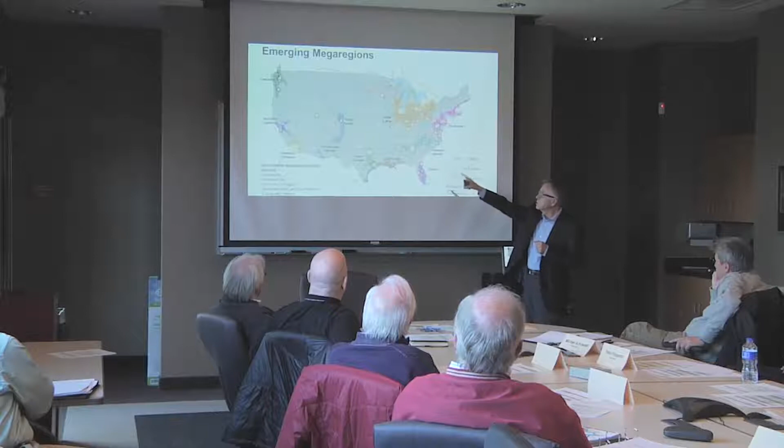You'd notice on these that the 6 million figure is the big circle. That's important for understanding where population is, where it's going, and where we sit in the upper Midwest—we're a small circle, about 1 to 3 million. But the influences of these mega regions are going to have an impact on us, especially if we start thinking about future climate impacts.

So you hear about California all the time right now about lack of water. It's also in the southwest and the deserts of Arizona. It's also happening in Texas. It's happening across the whole southern part of the United States.

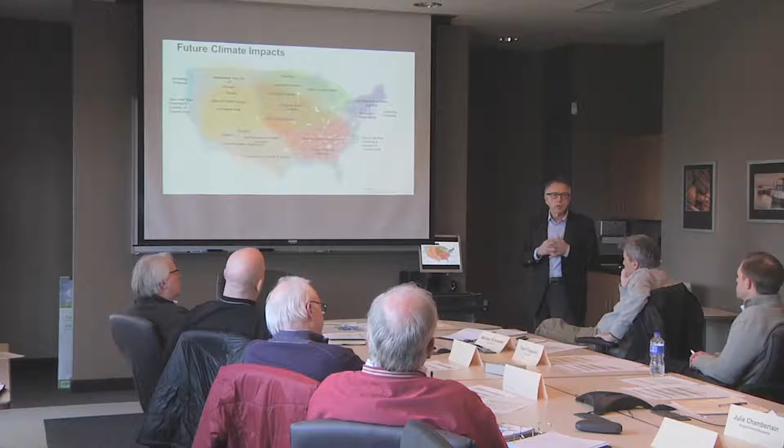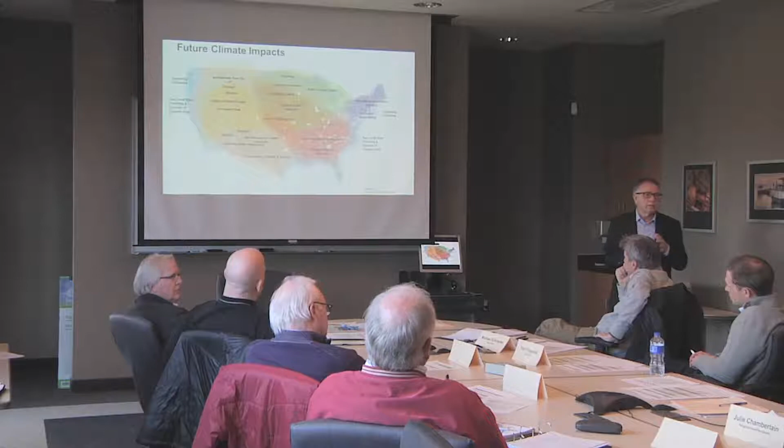What does that mean to us up here in the north, where we have an abundance of fresh water? Abundance now, and if we don't take care of it, we'll lose it. That means that our ideas about population could very well change. If we project over the next 15 years, we might have 600,000 to 800,000 more people, but if the current trends in the south keep going the way they're going, we could have 5 million more, and we're not ready. We're not even close to being ready for that kind of magnitude of change.

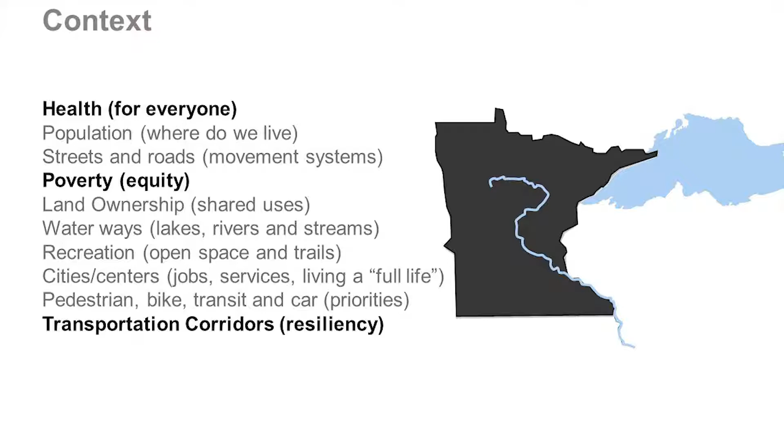So our context really has all of these issues, but focusing on the ones that have the most impact, we think, is important for how that will change the way we think about our cities. Health, again, for everyone. We know about population, streets and roads and movement systems. We've got to figure out the poverty and equity issue, land ownership, waterways, recreation, city centers, pedestrian, bike, transit, car, in that order, and then transportation corridors in terms of resiliency. So those three, health, poverty, and transportation, we think are important.

The way these things work is that there's a series of overlays. We've looked a lot at underutilized land and regional systems. You look outside anywhere in our region, and you'll find land that's not being cared for, land that's thrown away, land that's being used for things that shouldn't be used for. And so we've looked at a lot of those kinds of systems, and we want to use them to reconnect and re-aggregate some of the loose ends that we see.

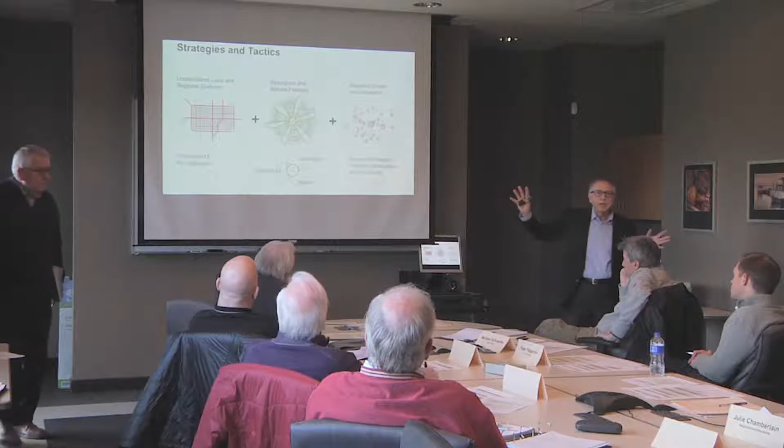We have to overlay that with the natural resources and natural patterns. Simple thing, but if you look out the window, there's a lot of green out there, and the way that's working is quite beautiful. That's just one small part, and that's the part that's being taken care of. There are many other areas that are not being taken care of. They relate to community, agriculture, and nature. We want to understand those relationships.

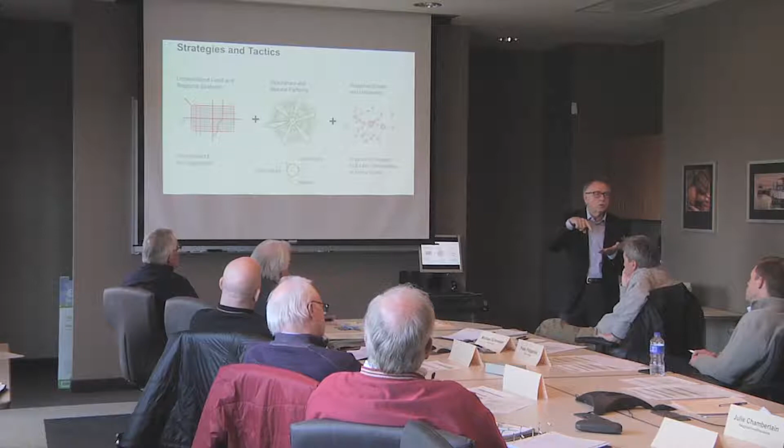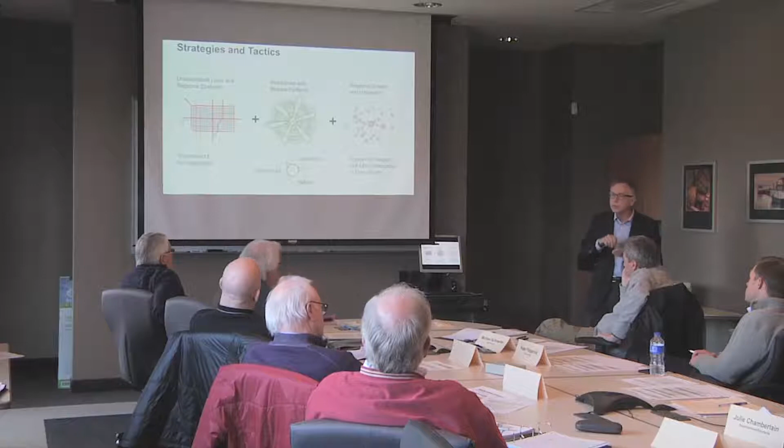And then when it comes to regional growth and habitation, we don't see Minneapolis-St. Paul as a center. We see this region as a number of centers. We all have to stand on our own, and we have to relate to one another. So Edina is the center here. It's not Minneapolis as your center. So that polycentric region, full life communities at every scale, is really critical for sustainable culture going forward.

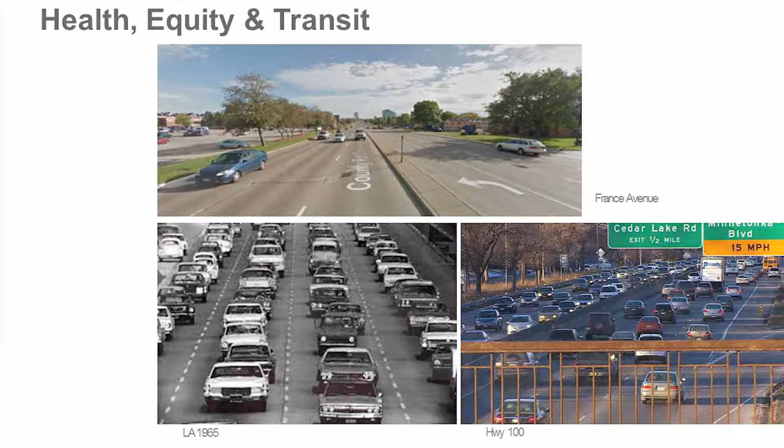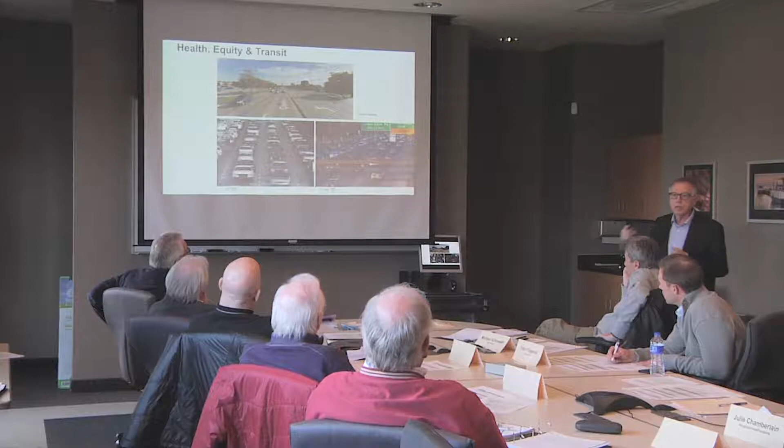And then you look to the right, and it hasn't changed. It's gotten worse. The land on either side has gotten worse. It is less taken care of. That's France up there. France is the same size as an LA freeway. We need to talk more about how that really impacts your lives and what that traffic is like.

So if you come back to those kind of traffic patterns, we want to look at the density of the region. The lighter colors, the sort of purple color, represent areas of poverty. That's where we drove our freeways through initially in the 50s and 60s. We wiped out neighborhoods, we cut them apart. But that freeway system is also something that connects us and can be a valuable resource if we start to use it as a resource and start to pay for it in the ways in which we should.

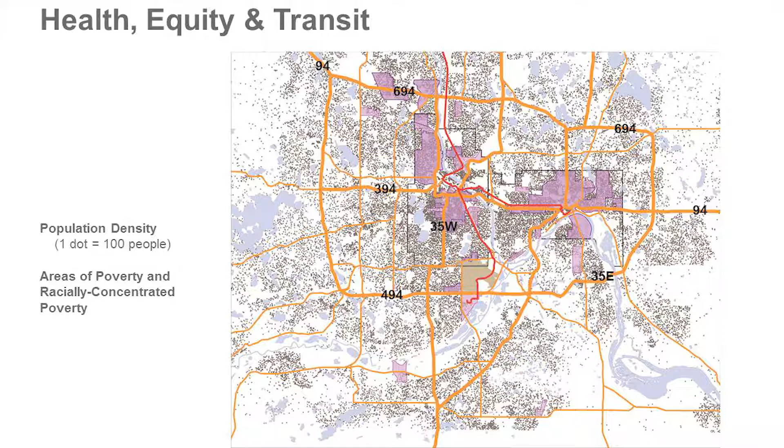It connects jobs. Now, we expect jobs to be easily accessed. They're not if you're spending an hour and a half in a car to get to your job. So we have to change the way we think about how jobs are organized.

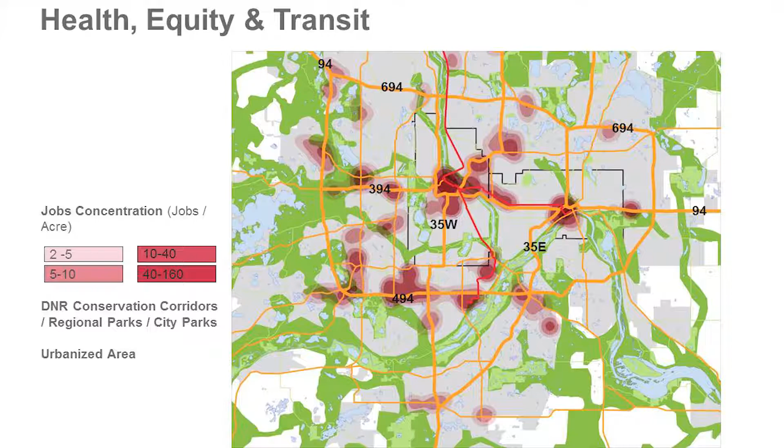If you look right down here, this is pretty important. That's where you guys are. You have almost as many jobs, if not as many jobs, as Minneapolis. You have half, a quarter, a third of the population. You have more jobs here in Edina than in Minneapolis. That's an important thing when you start looking at the connections that you need to make, the freeways and how they're used.

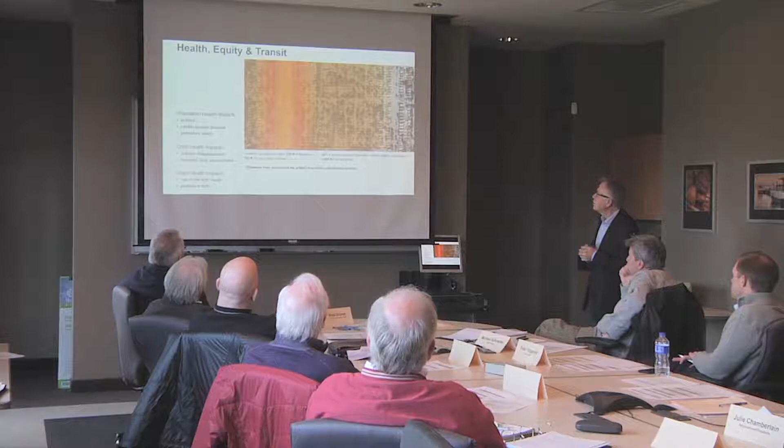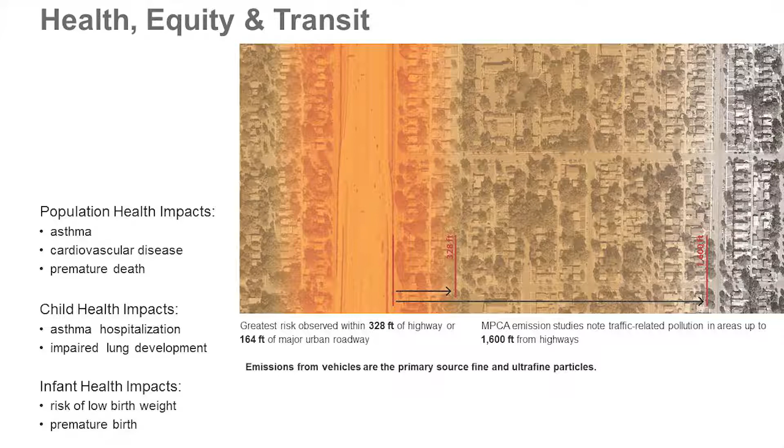The negative part of the freeway is it has a health issue related to it. Think about the freeway, and it's really dangerous in the amount of particulate within 300 feet. You have population impacts related to asthma, cardiovascular disease, premature death. For children, unbelievable—asthma is up. Impaired lung development is not good. Infant health risk, low birth weight, premature birth.

This happens to be where we put all the housing that relates to where the poor go or the disadvantaged. We put elderly in that same location because the land is cheap. But if you look at that risk, it goes for another 1,600 feet.

Just think about your street in France, and the amount of traffic on that, or Washington Avenue in downtown Minneapolis. It's as polluted as a freeway, and yet we allow that to happen every day and don't really take care of it.

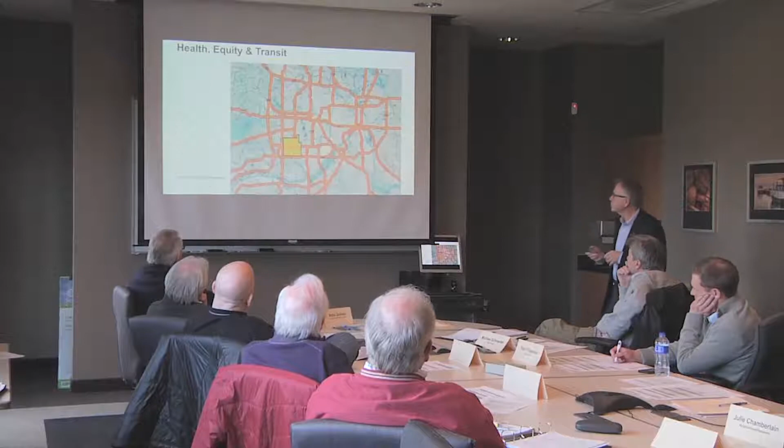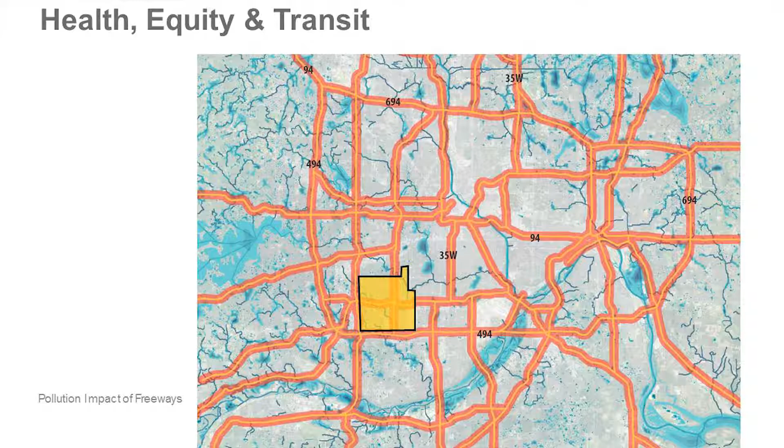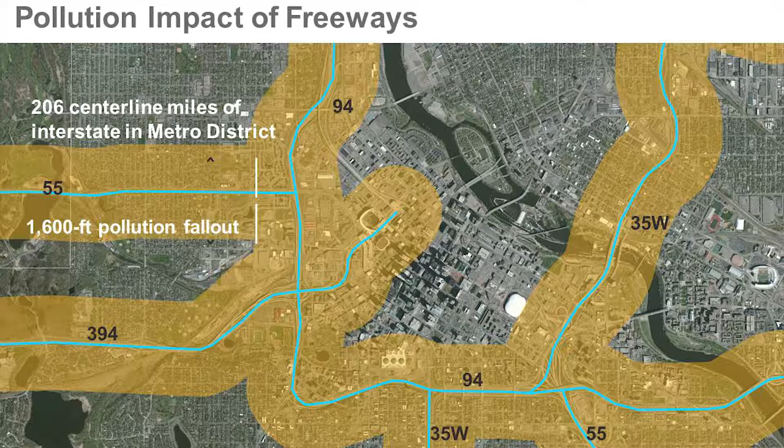So here we are. Here's your part of the world. This yellow line is the roadbed, the orange is the pollution. And when you look at that in greater detail, like in Minneapolis, there's not much left that isn't polluted. And that doesn't include the major roads like Franklin, like Washington Avenue, major roads that cut through our cities. So the impact on our health is being challenged every day.

But it also has created this kind of idea that the freeway is a place that is not valuable—it's only about a roadbed. So if you go out to 494, you go to Highway 100, just think about how those edges have been treated and what that experience is like.

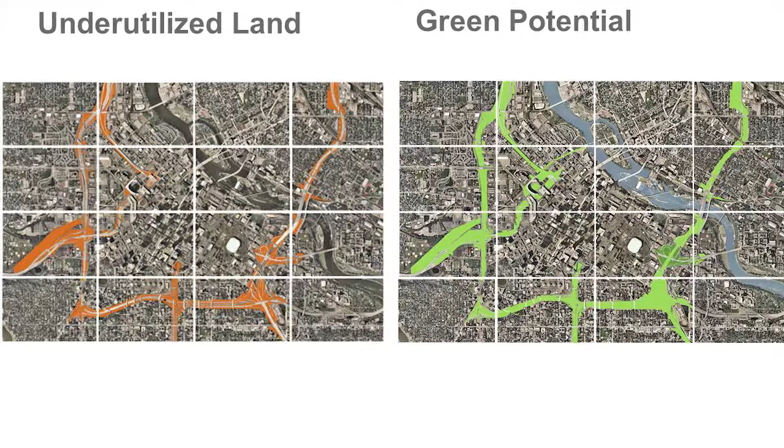So we think that underutilized land that sits around the roadbed on freeways is valuable. We think it has potential to become green. And what we mean by that is that green, that road system, that underutilized land can have a lot of other purposes. The green, by the way, if we made that a park in Minneapolis, that would be the same size as Central Park in New York, and yet we don't use it for anything at all.

So the green potential might be to provide energy. If we go clockwise, provide energy. We could use the red roadbed that's left, the underutilized land, for commuter high-speed rail. We could bridge it, we could knit it, we could reconnect our communities and create amenities. We could restore neighborhoods. We could build on it.

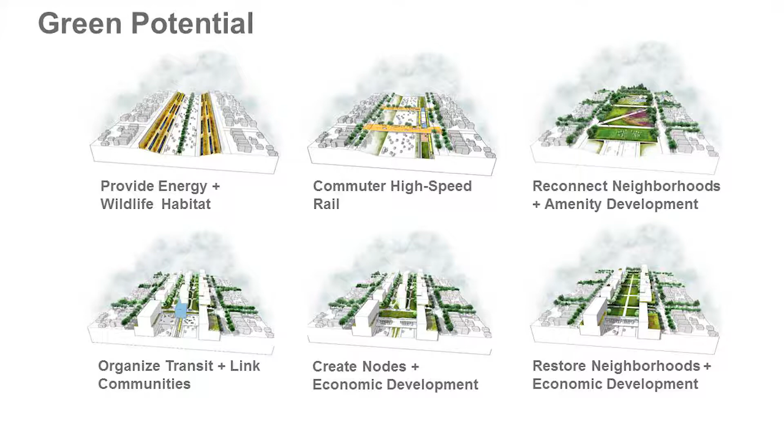We could build around its edges. We could create green. We could create district parking. We could use it for economic development. We could be an engine for change. It could organize transit and link communities.

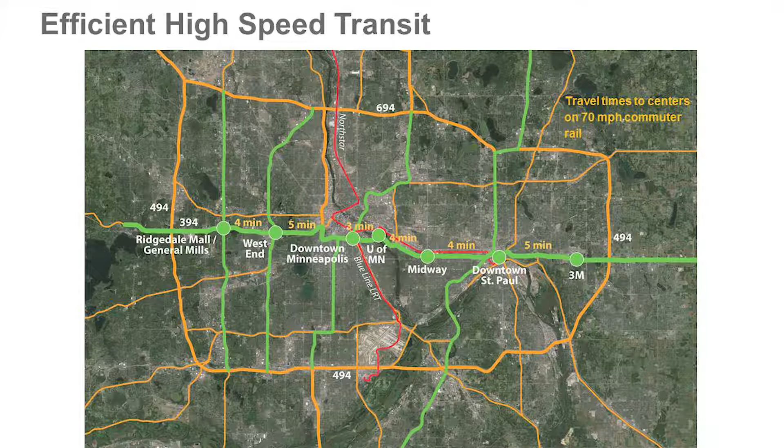In fact, we could have this kind of scenario if we used it for transit, high-speed rail, where you could go from 3M to Ridgedale in less than 35 minutes. What would that do to connect people up to jobs? If you're a single mom and you've got a kid and you're trying to get to a good job and it takes you a couple hours, that's not going to have a great impact on your social life, your cultural life, or your children's life.

So we've looked at that in a couple ways. We'll get to development in a second that relates to community, but freeway development—there's the roadbed on the left. The existing tax value is zero. It's negative, we pay for it. We don't get anything from it except the use of the road.

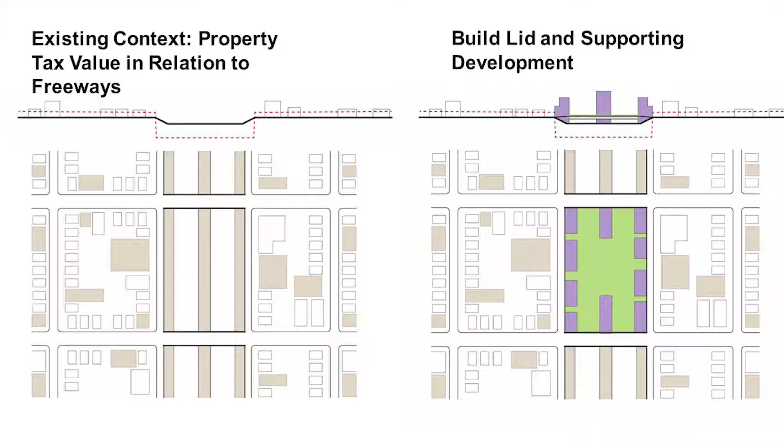But if we start thinking about using the underutilized land and started to build on that, then we start getting something that looks like this. So now that value of where that freeway was—we've got district parking in there, we've got increased value, increased taxes, we've got a localized boost in value, property value spreads.

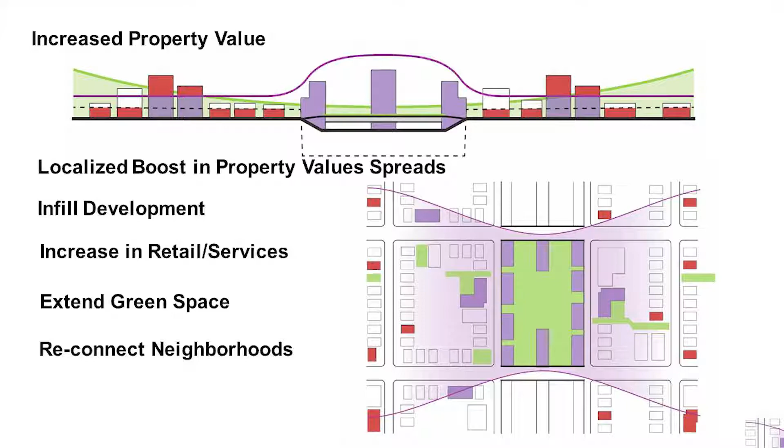We think that can be used to repair infrastructure. So you build and develop, and when that spreads, you get opportunities to start rebuilding what isn't working today. Infill development occurs, you get increase in retail services. That means that adjacent neighborhoods along the freeway that didn't have access to those services now have them. And that's an important change in the way the community edge works.

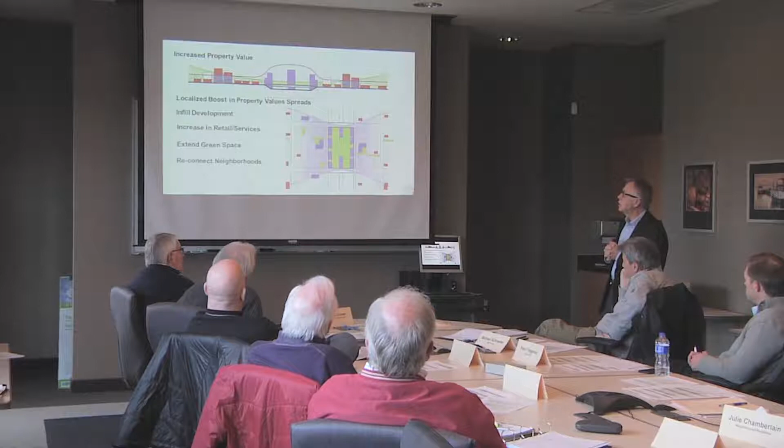We can extend green space and we can reconnect neighborhoods. This also happens in the middle of your city. It could happen in between France and York and 494 and 62, and it looks like this. There's lots of open land.

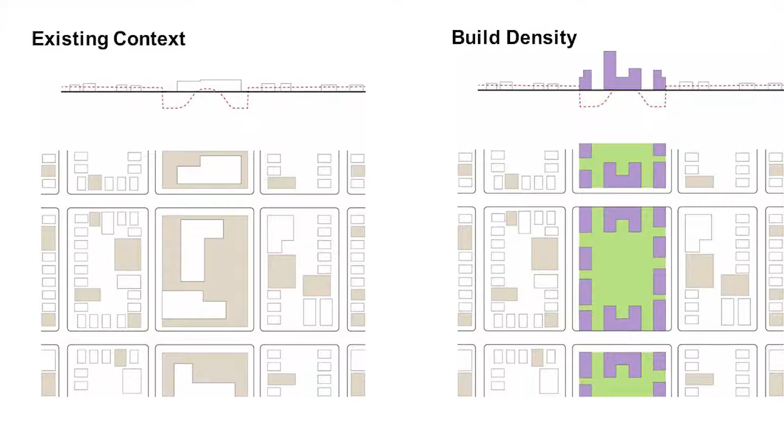If there's not the right sort of ratio of density in that area, then you're going to get lower taxes. If you begin to build density—and density can be a lot of different things, it doesn't mean tall buildings—then you start to get, again, that increased value. That's an important part of being able to use that in other ways. That's a way to develop your infrastructure, create more infill, increase retail services or services for the community, extend green space so you're starting to connect it out into the community.

So the best part of this, though, is when you think about it this way, you don't touch the existing context.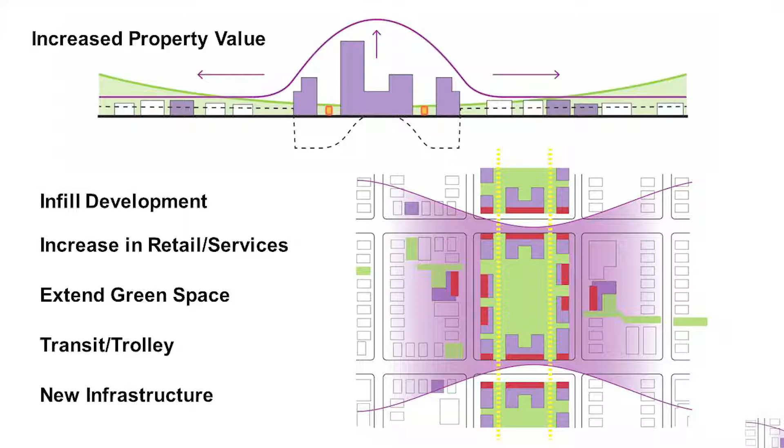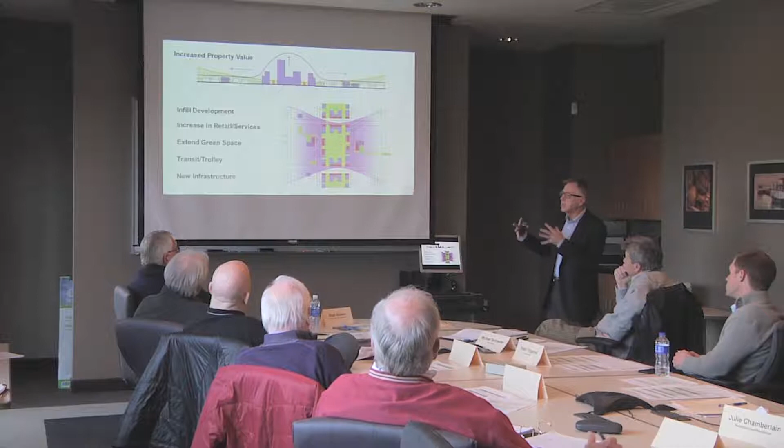You help it, you support it, but this is about not changing our neighborhoods. It's trying to build additional support for our neighborhoods. This is the most important part of this. When you look across your city and you see these neighborhoods you all live in, they're beautiful, they have history, they're part of the cultural and social life that makes this place unique. You don't want something to come along and change it and change it. What we want to do is make it better by adding things to its edges and making good transitions so that existing neighborhood gets to stay exactly the same way.

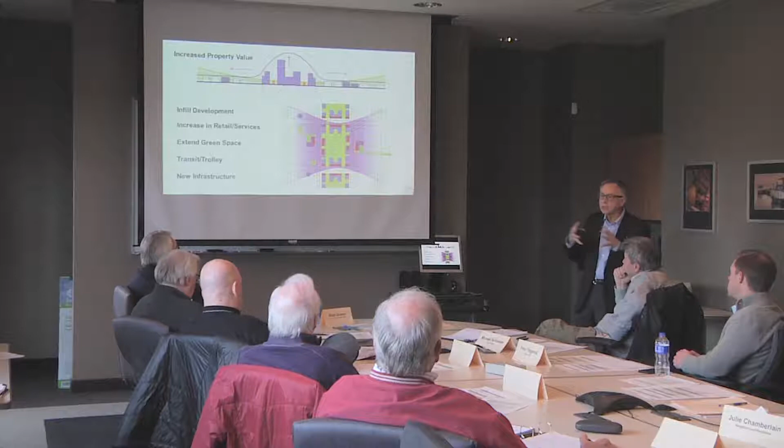So let's look at the underutilized land that you have and begin to understand how that can become part of what we want this to be holistically, in terms of a better, denser community.

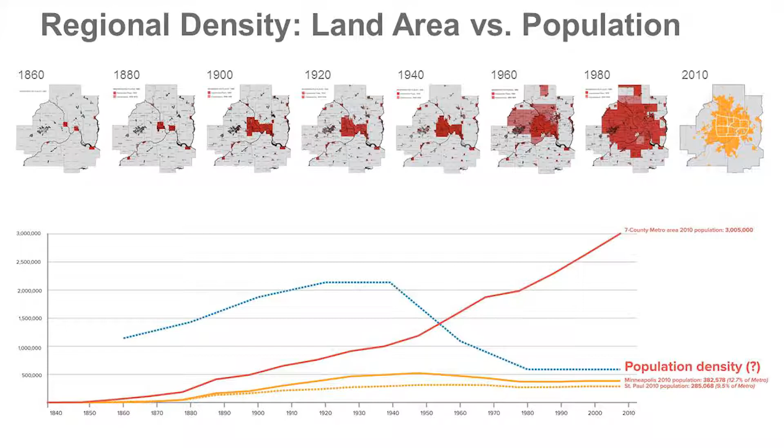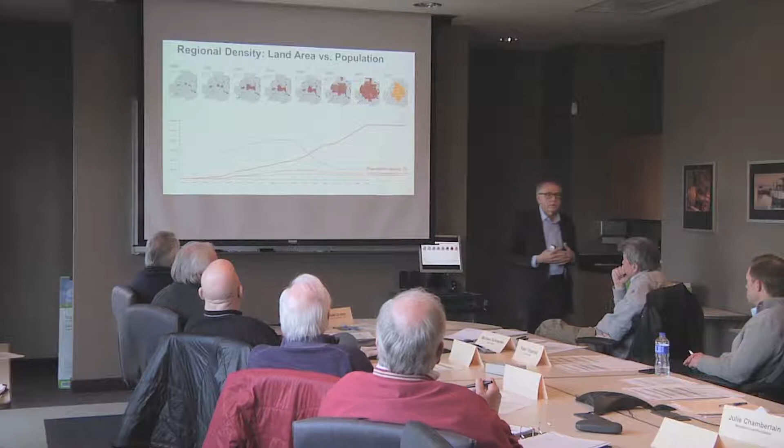So, regional density by land area: look at 1860. About 1940, we were doing okay. We had great cities, before the car and the freeway took over. They were more compact, population and growth were at a measure, you could get everywhere you needed to go. But then our density decreases as we get towards 2010, and we get all this land in between our cities. So we've gone the opposite direction.

The really scary part is that if you look at the combined area in our region, population of 3 million, we've got 426 inhabitants per square mile. That's our metropolitan area, a staggering number. When you get down to Minneapolis and St. Paul, we're at 6,000 inhabitants per square mile. So there's a big change there.

So you start thinking about how we live in between all these spaces. You get to Edina, we've got 16 square miles, and we're at 3,000 per square mile. So there's some capacity there that we're not recognizing, in the way we could begin to think about the spaces we have and change those.

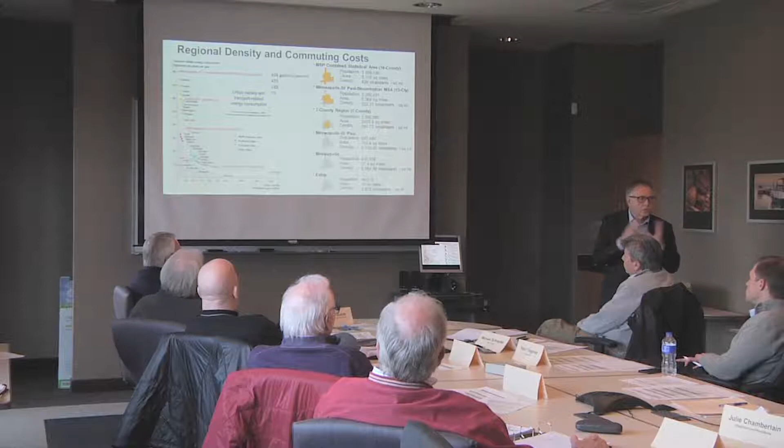The other thing: if you look at Minneapolis, in terms of the overall region, we use 608 gallons of gas per person. That means every person in the region, all 3 million people, could be in their car every day, every week — fathers, daughters, brothers, sisters, babies, all of us, all week long, driving our cars. And if you multiply that by 7, that's the number of parking spots we have on the national average for every car. So you can see we're being consumed by this transportation nexus of the automobile and energy.

So Edina is at 455 gallons per person. Minneapolis-St. Paul, just the cities themselves, are at 288. Copenhagen is at 75 gallons per person. That's a city with a different way of moving people, thinking about the way they live each day. The energy costs really drop in those cities as you get to the more European model of density. So how do you measure that?

Bruce, you want to talk about, we have a...

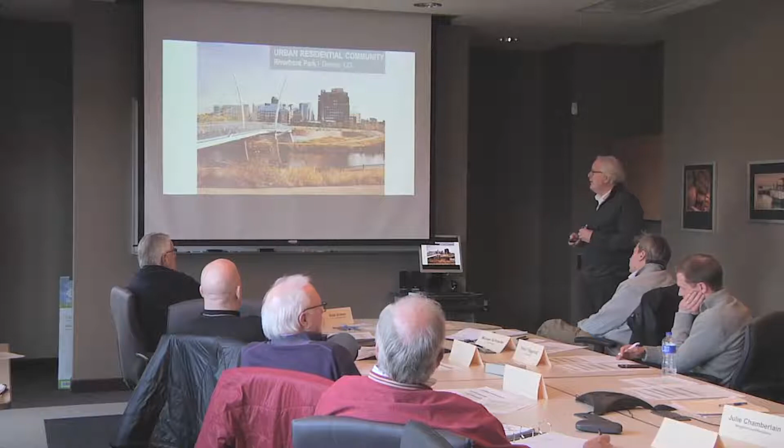So Denver, related to what Mick was setting the stage for, a lot of what Denver did in the last couple decades was really based on an enhanced public realm. When you talk about underutilized properties and taking advantage of sites that were laying forgotten, at the same time they had very powerful leadership.

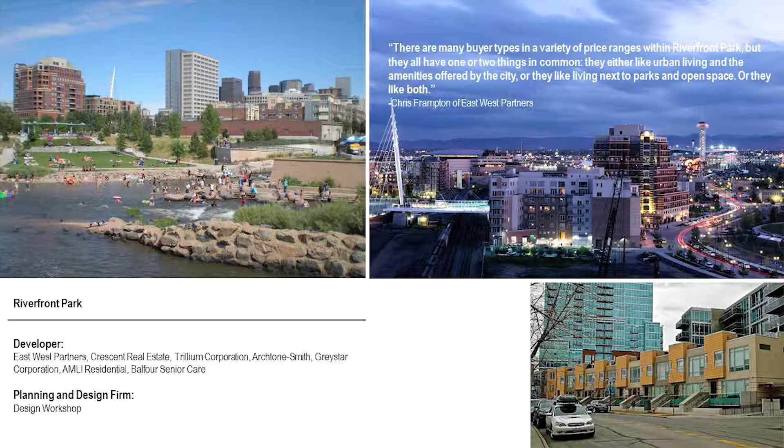Federico Pena at the time came forward and said, imagine a great city. He talked about building a transportation system that supported it. They talked about the Platte River Valley, a professional baseball team, a world-class conference center. All of those things came together at the same time, but it highlights that as they were examining all of this and paving the way for world-class development, it was this framework of public space, movement systems, and infrastructure that really made it possible for all these other parts and pieces to come in and populate these areas.

So what you're looking at here is the Cherry Creek Greenway on the left, and the Platte River coming through, and where the two join is called Confluence Park, a whole area of redevelopment. I'm sure you've at least heard of or seen articles about Lodo and the rebirth of much of downtown Denver around their ballpark and so forth.

And it wasn't urban renewal, it wasn't tear-down. A lot of it was adaptive reuse, really based on working with the strengths of what their downtown had to offer, capitalizing on natural resources and public realm.

So phased large-scale projects, knowledgeable landowner, enlightened leadership, but what came out of that was a better than expected level of investment from the private sector, and it intensified—but not all tall buildings, rather a mix of different housing types and height and density models within this whole corridor.

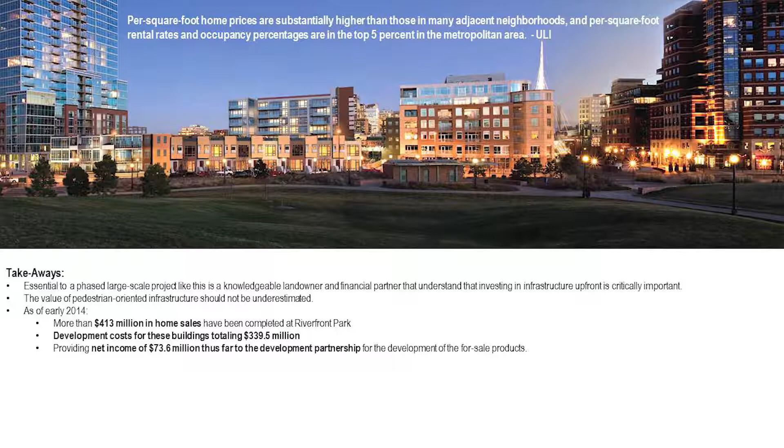Net income of $73.6 million thus far for the redevelopment that's gone on in that part of the city. It's been a positive win-win for everyone.

Downtown Austin. Two things about Austin: one of the things about downtown Austin that really came about was a partnership with the university, and so the rebirth of parts of that downtown was really predicated on the university coming forward and making its own investment.

But there are other parts and pieces similar to Denver, where they're looking at underutilized land, the amenity value of riverfront, and all these underutilized parcels, and how you convert that integrated with a great public realm framework, infrastructure, and movement systems to do these kinds of projects.

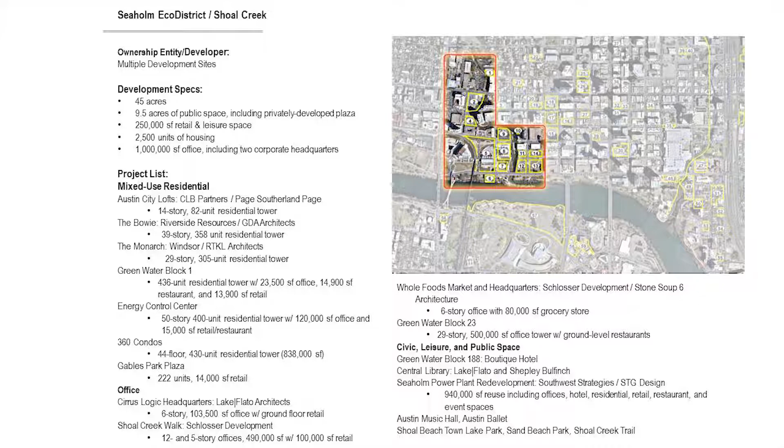So the development specs there: we're talking about 45 acres, trying to relate these things to the Southdale corridor in France and York and so forth. 9.5 acres of public space really was the framework for development, but what it led to was mixed-use residential, office users, civic, leisure, and public space. It was really about jobs creation, public space, housing, and this fabulous mix related to amenity and infrastructure.

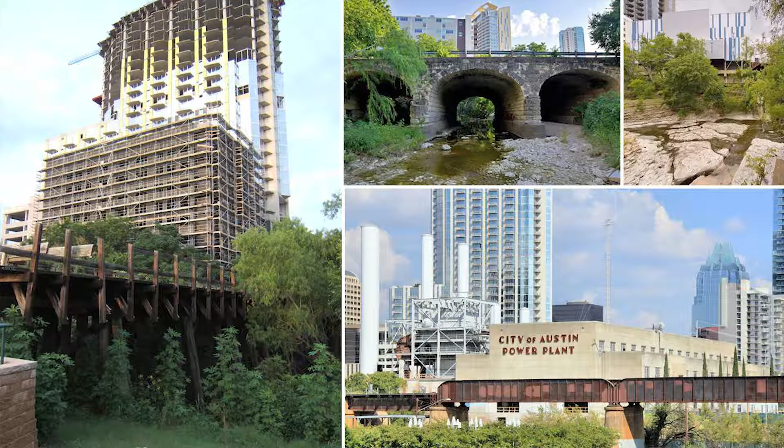Also talks about the events—there's a programming component to this. We've talked about this at scale: where is the center of urban life? Where are people, where are you trying to attract people? Where are they inclined to come and gather at various scales, whether large events or small events, and how the street functions as part of the public realm.

Attracting jobs is a big part of what we're talking about here. Mick touched on the fact that with France Avenue and York and so forth, those corridors - 76th, 78th, whatever - are really primed to bring in additional employers.

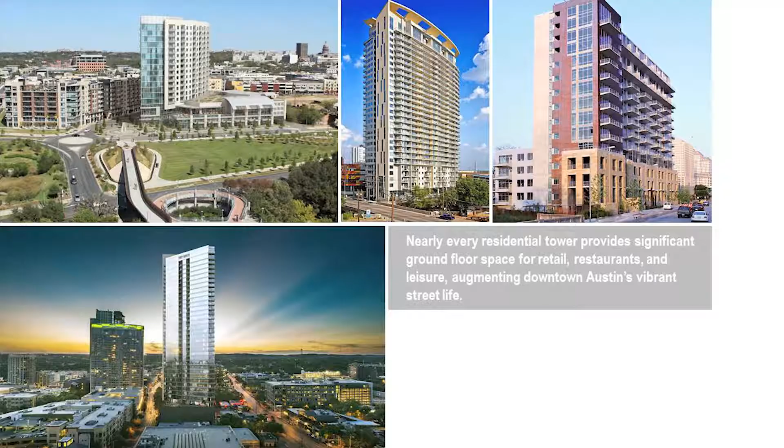Nearly every residential tower provides significant ground floor space for retail, restaurants, and leisure, augmenting downtown Austin's vibrant street life. Different models, like Mick was talking about in the diagrams - whether you're holding on to more open space and doing more of a tower, or you're spreading it out with lower building heights and so forth.

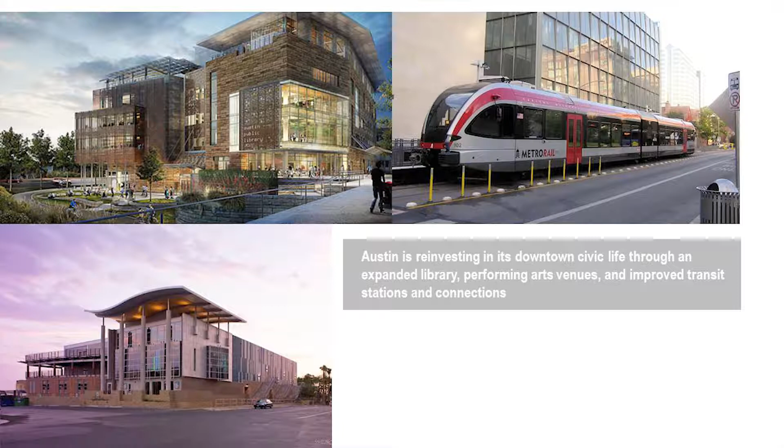Expanded library, performing arts, and improved transit stations. So cultural pieces are all part of this fabric, the integration of all these different layers to make great cities.

Touching on the outcomes, new development exhibits street room concepts that reinforce the public realm by providing a sense of scale, light, and enclosure at the streets - towers for residential and office space, creating a compact connected city, with a variety of restaurants and retail on ground floors encouraging street life.

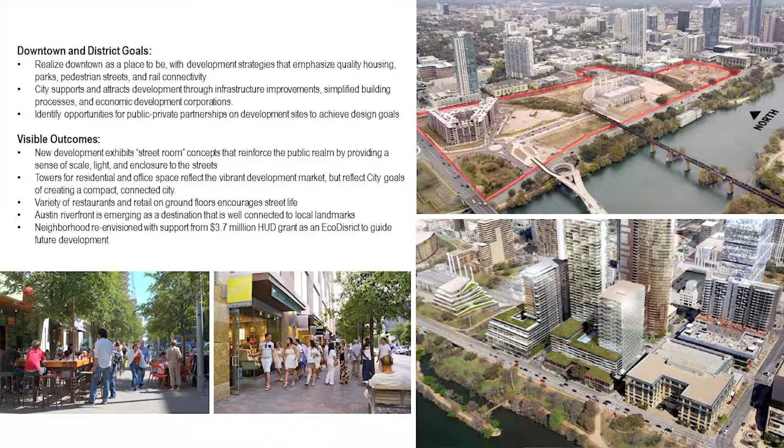Austin Riverfront is emerging as a destination. That's a big part of what we want to talk about - what are the destinations in your city?

Neighborhood re-envisioned with support from grants, eco-districts - that's another thing we've been talking a lot about. There are a lot of different ways to go at this. This 21st century kind of community building we were talking about, eco-districts, is becoming a pretty interesting approach.

Go back to Mick - because in Salt Lake, their downtown hasn't had a lot of synergy to it over time. The City Creek Center is really utilizing a couple blocks of existing buildings, existing infrastructure.

It's a 20-acre site, 700,000 square feet of retail, and 1.2 million square feet of housing. So there's a balance between retail, housing, and office space, which is kind of an important thing. If you get one too high over the other - too much retail or too much office space - then you don't have this balance that creates community.

You have too many people leaving or too many people coming in, and not enough people that live and work in that place. So that balance is really critical.

The stats on this - I think it's helpful to be adjacent to Temple Square and the LRT line, because that's part of the culture, that's part of new transportation.

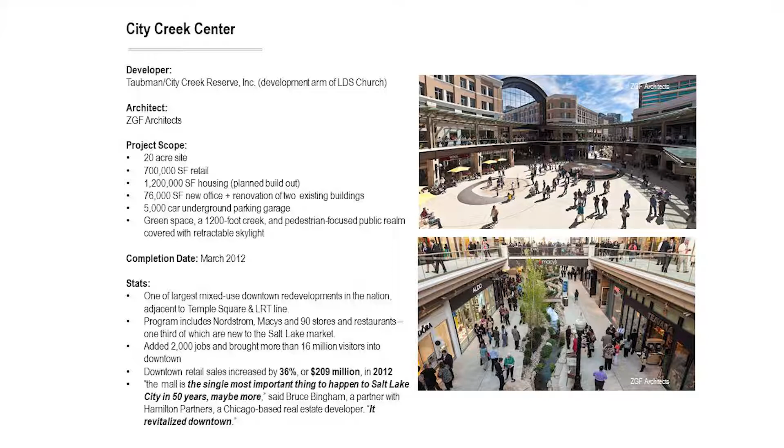The program introduces Nordstrom's and Macy's and 90 other stores into the downtown core. It's added 2,000 jobs, so that's really positive for the neighborhood. And I think it has had a huge impact in the way that people think about it.

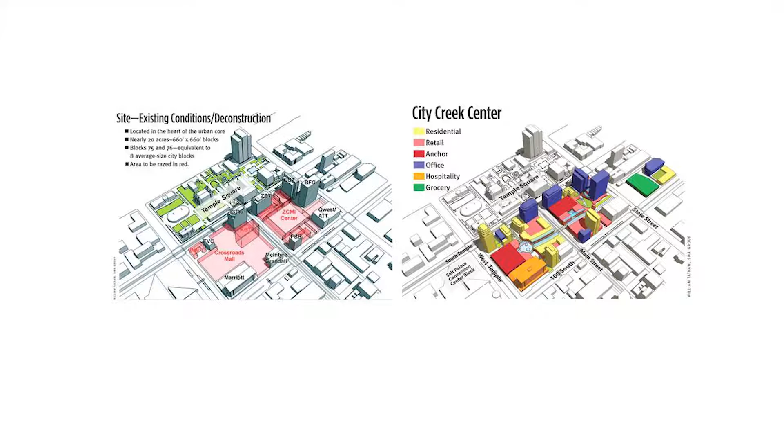Here's Temple Square, and this is what it looked like before they put this project together. So there's a lot of good existing buildings - you can imagine this being in Southdale, a lot of good buildings that need to be kind of connected back together.

From a retail point of view, they looked at it as a linear scheme. They had a typical kind of retail structure - you've got the big stores at either end that draw people across this whole plane of activity. And so it looks like this.

I think, wow, it looks like a place you want to be in. It has great scale, the transportation is very accessible. You know immediately how this place connects up, which is part of being in the language of architecture - the language of both public realm space and a sense of what this time is.

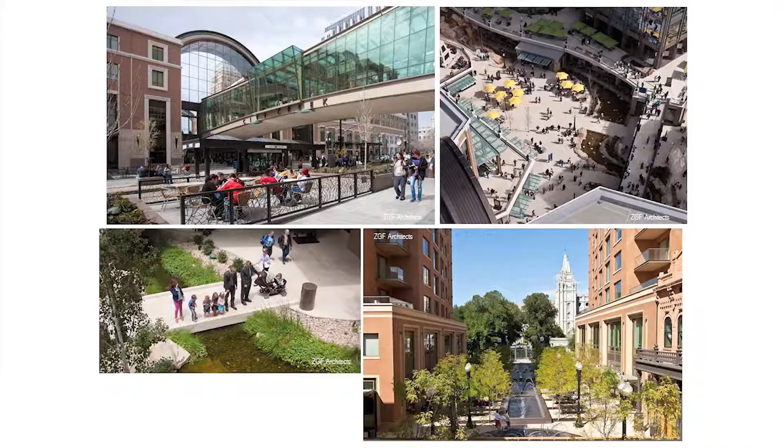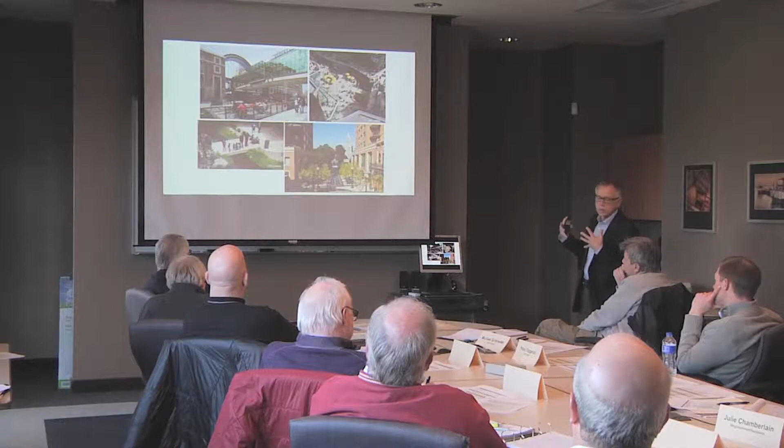If you walk through it, there's a lot of different places to be in at multiple levels, so it isn't just one level, one plane. It's a fabric that's being enhanced that already exists. And it's that weaving back together of a place, bringing people to every corner of it, that makes this a very successful project, I think.

The other one I like very much is King's Cross, in London - this is a 67-acre development, and 40% of it is public realm. So out of that 67 acres, 40% of it's going to be used in a different way.

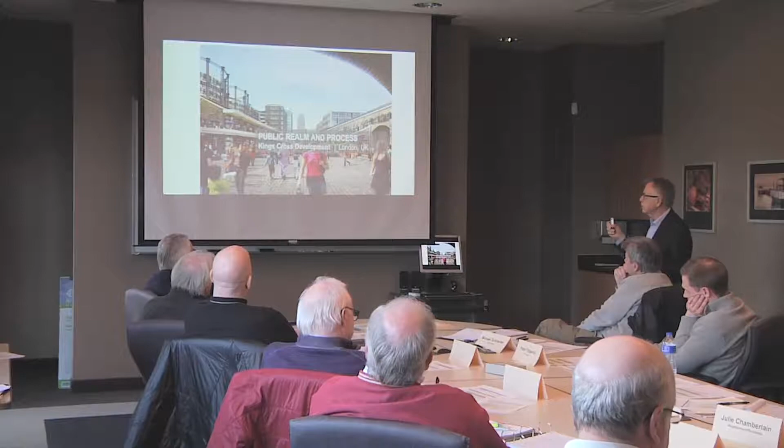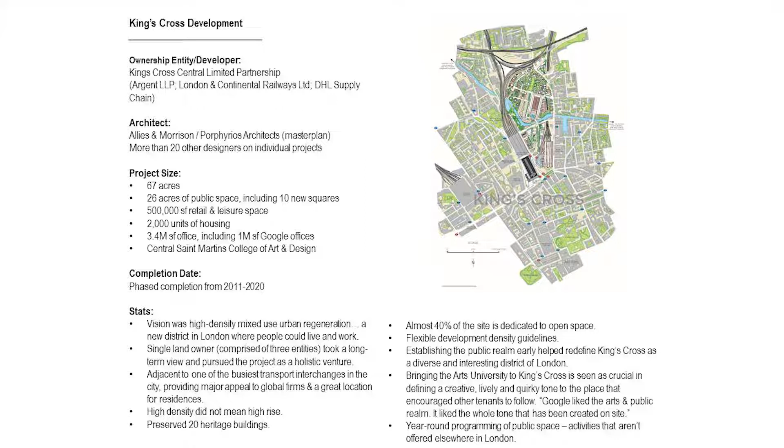Part of that is this notion the developer had - they said, well, if we pay attention to the public realm, if we take care of every alley, every square, every paving and lighting pattern that we have, this is going to be the emphasis, the incentive to build here, that people will want to come.

And it's kind of proved out in that sense - you get a sense of the density. You've got a huge train station that connects across the channel, but you've got all these potential buildings. They didn't design the buildings - they designed the framework for the buildings. They didn't take that on. They wanted to make sure they understood all the dimensional characteristics.

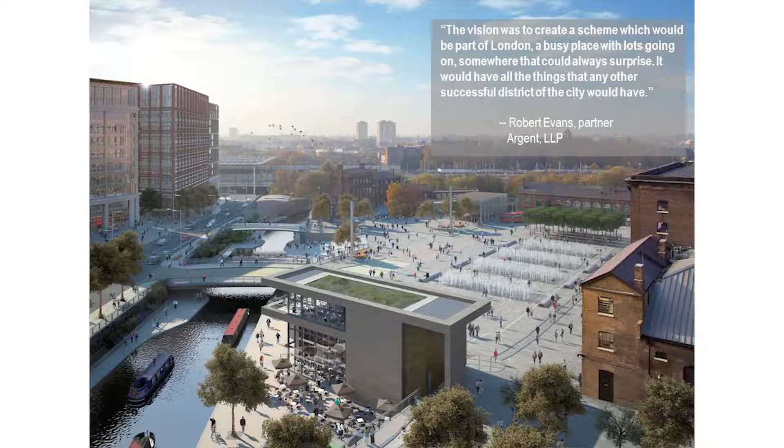You have places like this that they did build, and that was the incentive to get others to come there. So who signed up first? Because it was a great public realm, a great place to be in, it was Google for 1 million square feet. It causes people to look at the structure of a place. If it's beautiful, if it's exciting, if it connects to the history of the place - they restored 20 buildings - if it's part of the history, the connections, people like it. They sense that they want to be there as well.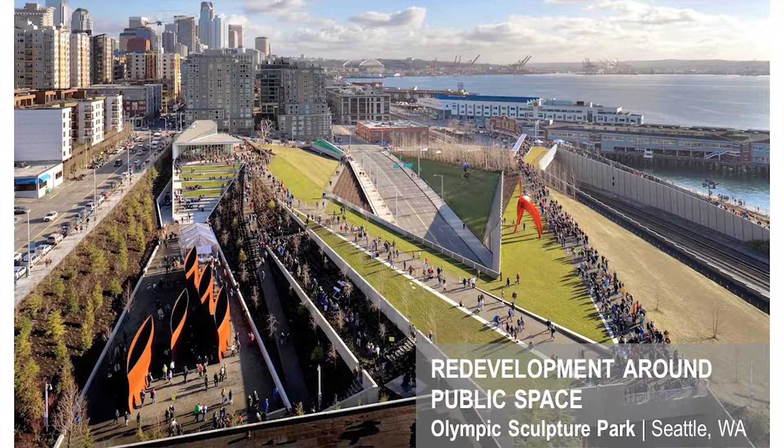This is Olympic Sculpture Park. There's actually a major highway that runs through this, also a rail line. Part of the idea was how do you get the community that's more towards the east over these roads and down to Elliott Bay. They devised this method where, when you're on this landscape, you don't even know you're over anything below you. You have this sense of easy walk. It's all accessible, so anybody gets to go, everybody gets to go.

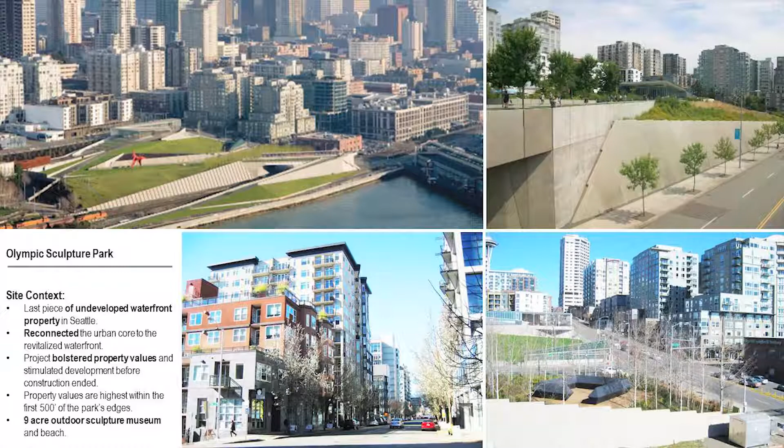There's an amphitheater, places to be in, things to do. It's really reinforced development on the edges, brought about increased property values and a change in the way people thought about what was kind of a hole in the fabric. They've also been able to restore the salmon fisheries along the edge of it, all the way down to Elliott Bay. That has made a huge impact.

They did this in a way that's really unique in how they organized the structure. Everybody thought it was going to cost millions and millions. It came in well below their projections because of the way they thought about it, organized it, and conceived putting it together. So you see it's a pretty active place and quite simple in many ways.

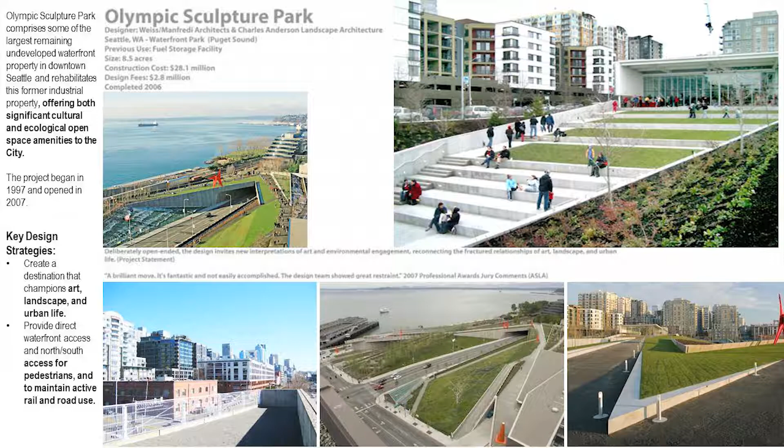Create a destination that champions art, landscape, and urban life. That's a pretty good key design strategy, I think.

Development of public space - again, this is over a freeway, and again the underutilized land concept. You find the right place between two things, between an arts district and an area that's developing but still has a lot of holes in it, and you build a 3-block park over a freeway in Dallas. It looked like this before. They put the park over it. Pretty simple structure - it has a couple pavilions, a children's play area, a performance space, and there you see the Dallas Museum of Art, and then the Nasher Sculpture Center.

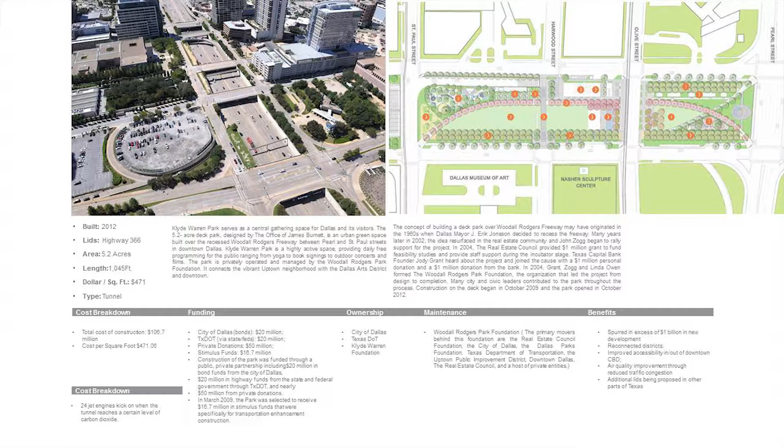The thing they thought about with this park was they hoped they would get $350 million in new development. In the first year, it was over $1 billion in new development, because these are the kinds of places people want to be in. I was there a month ago, and this place was just - on the first sunny day, the grass was already beginning to wear out, there were so many people in this place. So you can't deny that public space, done in the right way, is what brings people together. It really does create that sense of place, and a sense that development is part of how we make places better, not how we make places worse.

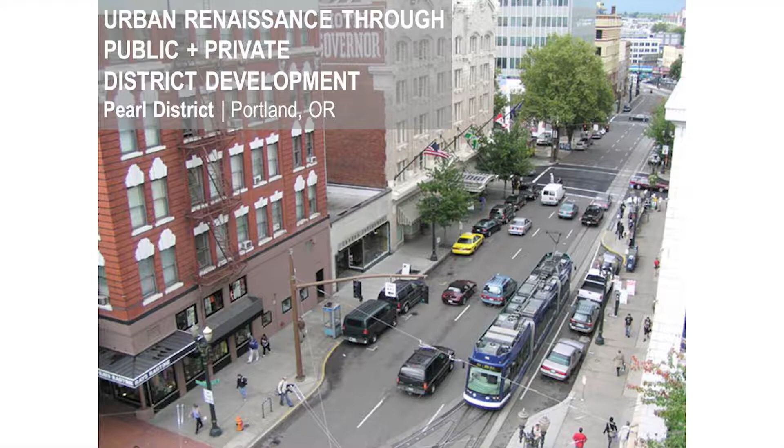And then last, I want to share a little bit about Portland. I started working in Portland in the early 70s. I was a student first, then looking at urban areas. We were actually a group of students battling a high-rise going up in downtown Portland that was going to wipe out several Victorian-style houses. It didn't go anywhere, except it got people interested in what kinds of places we were living in.

It was also at the same time they were planning a new freeway connecting out east of Portland called the Mount Hood Freeway. All of those things were beginning to cause people to sense that the city was outside of their control - all these infrastructure projects, all these big buildings going on, and nobody who lived there got to participate. And along came the first mayor I ever really paid attention to, Neil Goldschmidt. He came in and reorganized the Planning Commission, reorganized how the process for design was going to work.

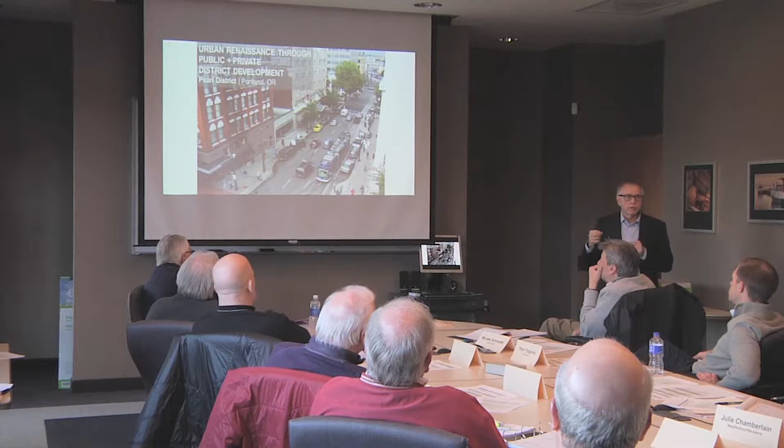They defined the whole city, every building, every corridor. They made rules like 75% transparency on all sides of your building, and simple things like everybody had to plant a tree. If you were a developer, you had responsibility to the public realm, so you had to take care of it. It wasn't the city's responsibility, so you had to put trees in and do things that contributed positively to that city. So you got development that started to happen that looked like what happened in...

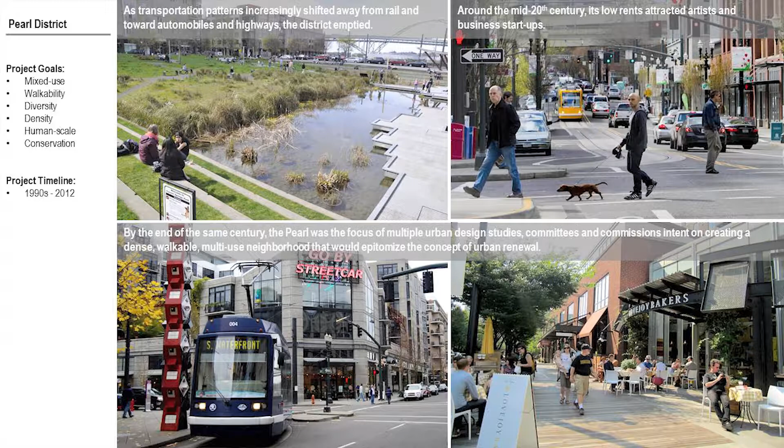The Pearl District, in an existing warehouse district that was also connected to a bunch of rail yards that were being abandoned. The great thing about Portland is it has 200-foot square blocks, which means there's a density built in for pedestrians. What people used to tell me is, thank God they're 200 feet on a side—that means no one architect can do too much damage. So it was great for my ego at that time, but it really did make a difference.

That kind of scale means that every 200 feet, things are changing. There's variety, and that impacts the way you walk through a city. You walk across Portland and feel like you've not taken any steps at all, but you've seen everything—it's that scale that brings you into this place.

Go ahead. That's a park? You mean this?

Is it a reed pond? No, this is just water infiltration as part of the park system. There's a park system called the Park Blocks that starts up at the university and works its way all the way down to the river. There's a series of parks along it—this is one of them. They actually believe it's okay to use wood...

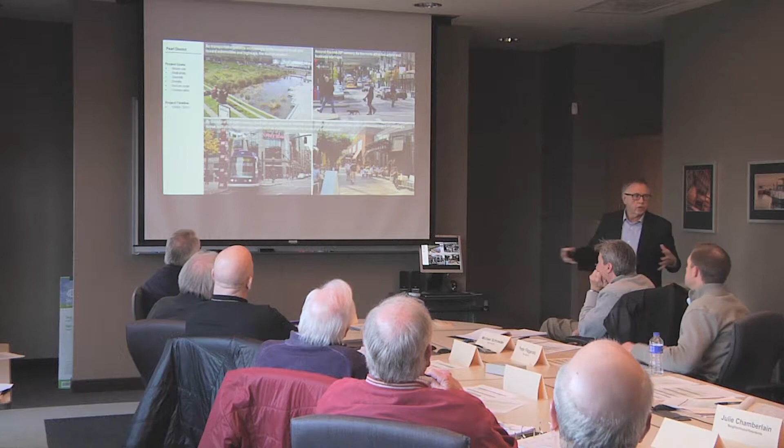As walkways, changing the variety of textures. There's a lot of brick in Portland, a lot of stone. Transit way and rail are defined differently than bus, so you might have more cobblestones on the rail transit than on the bus malls. Everything gets changed up, but there's a palette of richness there that's controlled by quality.

And that's really the key. If you look at everything they do, there's a standard that doesn't get changed out because of a new idea—that new idea has to meet that quality meter.

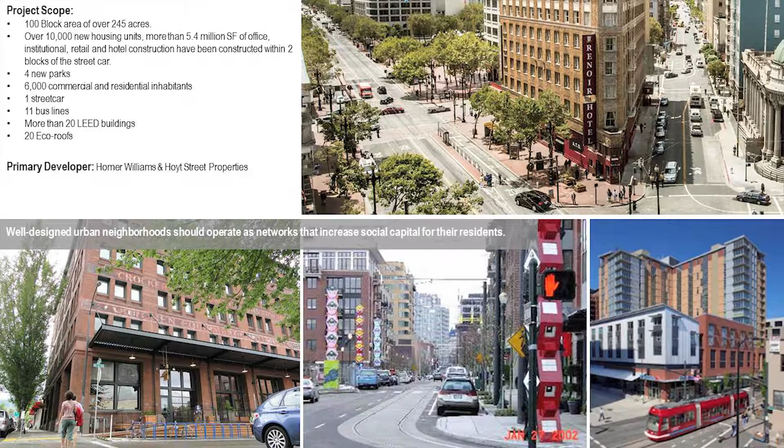So you look at the scale of these buildings, and it's quite varied. You really don't see many tall buildings in Portland. You see a lot that are 15 stories, a lot that are 6 or 8 stories—quite a variety. You do get taller ones in certain areas, but it's that scale that makes it a really interesting city to be in. And its connection to green is always apparent—lots of trees, lots of canopy.

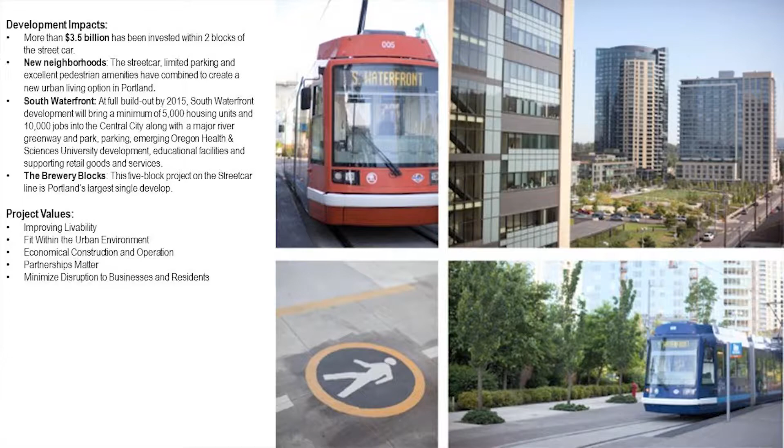So if you imagine what these trolleys and rail things do, they connect, but they also bring investment—they offer a way of connecting. Imagine in your city being at 494 and going all the way down France to 44th, what that would do in terms of connecting up Edina. Maybe you make a left and end up here. Think about how that whole network begins to change the way people work and live in a place.

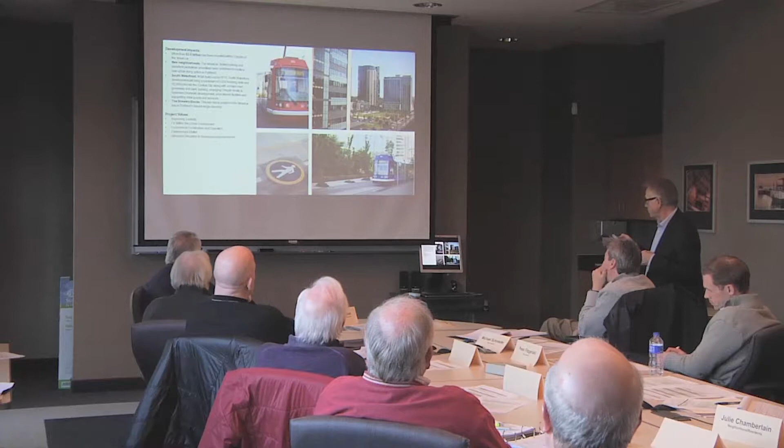So that's all the stuff we're going to show, except I think there are a couple things that are important to me—that we keep a focus on health. Health, again, not health care, but health in terms of how we live each day: we're able to walk to work, walk to entertainment, walk to get groceries. It's all accessible, and we let go of the car.

We keep our focus on equity and jobs. A big part of great environments or great cities is jobs are everywhere—down the street and around the corner, not 5 or 10 miles away. They're everywhere in the place you live.

We want to make our community connected, recognizing that neighborhoods are all unique, that the way housing stock was built and the time it was built, and the way you live in it, is unique—and you want to connect it to new things. You don't want to push it away or push it aside. You want to create a positive framework for development. A framework for development means that as a community, you've defined what development means and the scale of development.

You've defined the public realm in a way that development supports the life of your city. You increase density in the right places. There's a lot of wrong places to have density, and the right places are really critical because they'll become a catalyst for growth.

How much did—I understand there were more definitive rules in how developers would work, but you had to incentivize them somehow in Portland. One way was defining a zone outside of which no growth could happen: the urban growth boundary. They defined that early on, and it really made people look back toward the center and make certain they used every bit of available land to its fullest potential.

We don't do that very well here, or at all. But the other thing that happened is people began to see that if we do this, all the value goes up. Everything gets better, it doesn't get worse. And there's a point where it turns and people go, well, this is the way we should do it.

And that's when everybody goes, ah, now they're developing all those open spaces and there's not many of them left. The problem they have now is they've got a great dense city, very walkable, but they still have too many cars.